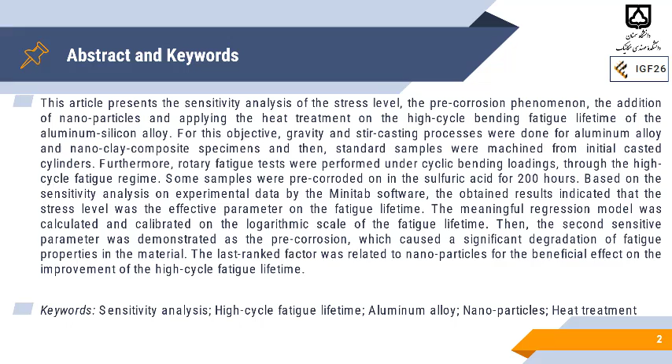Here you can see the abstract and the keyword of the article that will be introduced in the next slides.

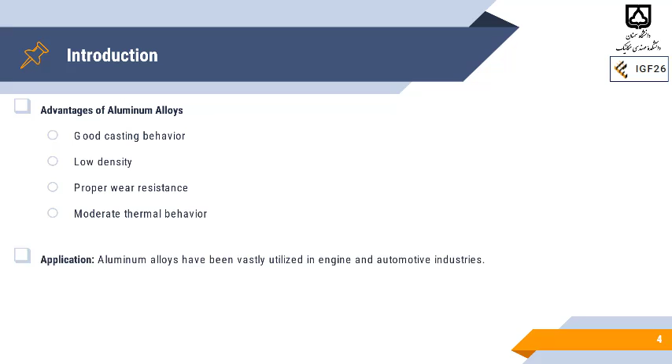For the introduction, I should say that we know about the advantages of aluminium alloy: good casting behavior, low density, proper wear resistance, and moderate thermal behavior. So because of these properties, we have different and a wide application for aluminium alloys.

They have been vastly utilized in engine and automotive industry. But what is the problem?

The problem is corrosion phenomenon, especially in combustion engines, especially in diesel engines, due to the presence of sulfur in the fuel. And what is the working condition in this component? That is cyclic loading under environmental effect, including high temperature and corrosive fluid in diesel engine. So we need to check the corrosion fatigue phenomena in aluminium alloys.

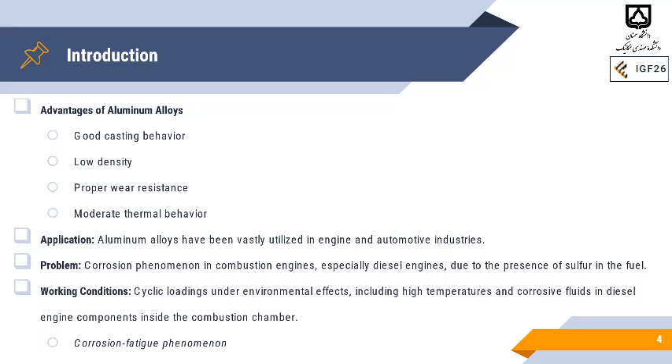What is the research method here? The material is as-cast piston aluminium alloy that was casted in a cast iron mold by gravity casting, but for the nanocomposite, we have used stir casting with 1% of nanoclay particle.

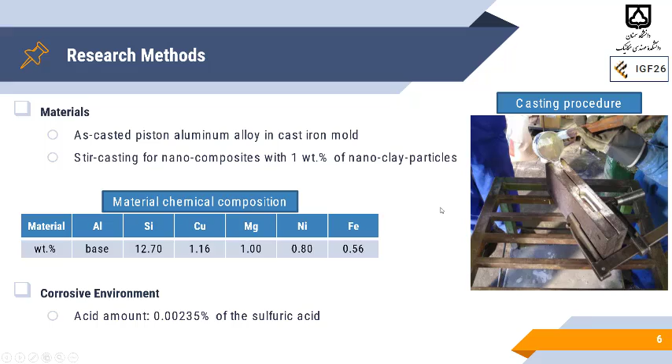For fatigue testing, we have used pure bending fatigue testing based on ISO 1143. That is our standard, that we have used under 4 stress levels: 120, 150, 180 and 210 megapascal by the SFT 600 rotary bending fatigue testing machine.

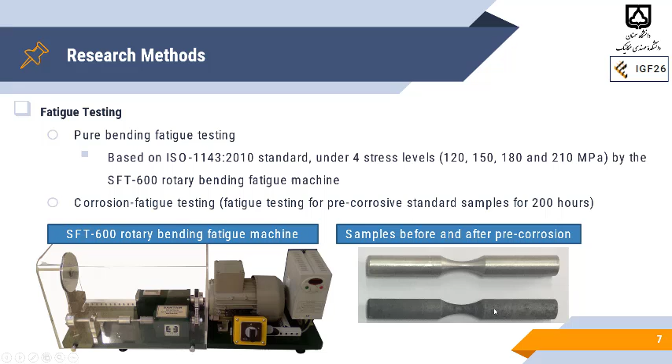And what's happened to our corrosion fatigue testing? We have done fatigue testing for pre-corrosive standard samples after 200 hours in the acid environment. Here also you can see the device, the testing machine, and also the sample before and after the pre-corrosion phenomena. You can see here some pits could be found on the surface of the sample due to the corrosion.

For the sensitivity analysis, we have used Minitab software for the regression analysis. If you use the risk level as 0.05, then your p-value should be less than this selected risk level. And if you have a higher f-value amount, it means that you have a higher effect of inputs on outputs. So if the p-value was less than 0.05, it means that your parameters, the inputs, are effective on outputs.

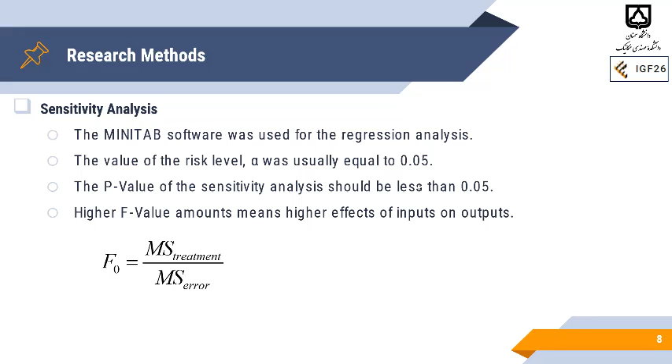And what is the input in our tests? Here is stress, pre-corrosion, nanoparticle, and also heat treatment. And what is the output here? It is the fatigue lifetime, both in normal and logarithmic scales.

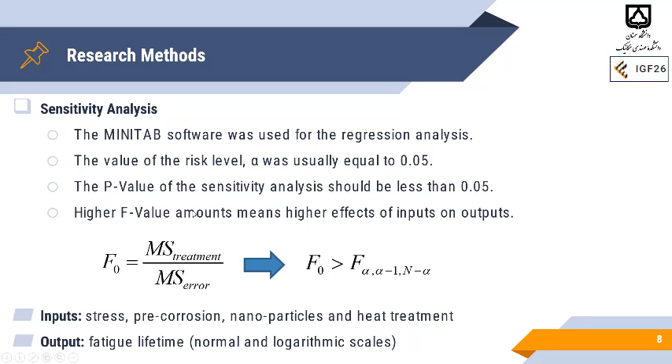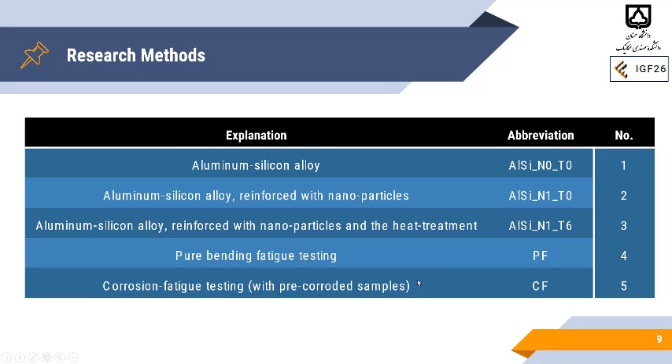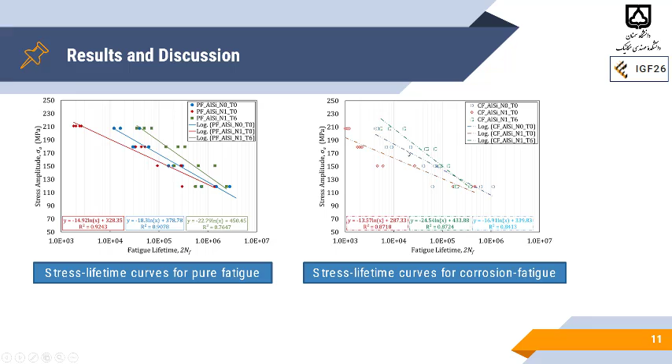If you check these curves, you can find that the nanoparticle heat-treated materials have higher lifetime, shown in green color lines, and here we also have the same behavior for corrosion fatigue. So under high stress level, the corrosion fatigue lifetime of aluminum alloys reinforced with nanoparticles and heat treatment increased compared to the base material.

This result could also be found in the literature, reference number 1.

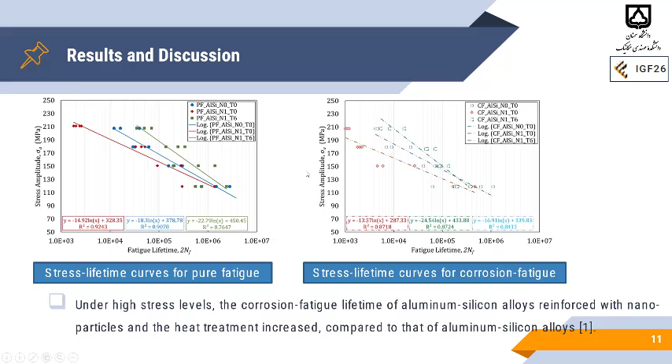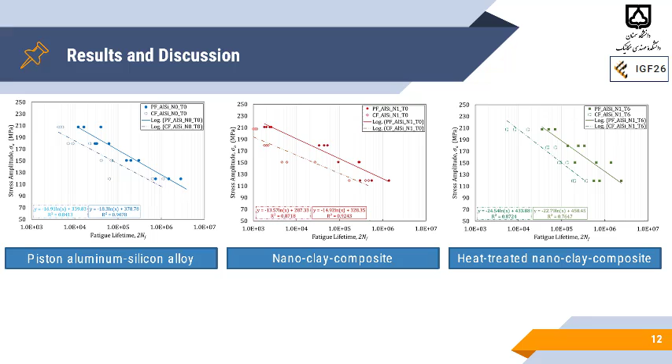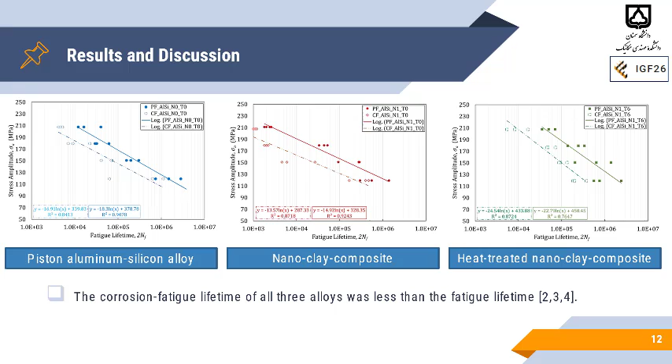For a better comparison, you can see here the pure fatigue curves besides the corrosion fatigue curves. The first figure is for piston aluminum alloy, the second is nanoclay composite, and the third is heat-treated nanoclay composite. Again, you can see a shift in all the results for pure fatigue, so the corrosion fatigue lifetime of all 3 alloys was less than the fatigue lifetime. Such behavior was also seen in the literature.

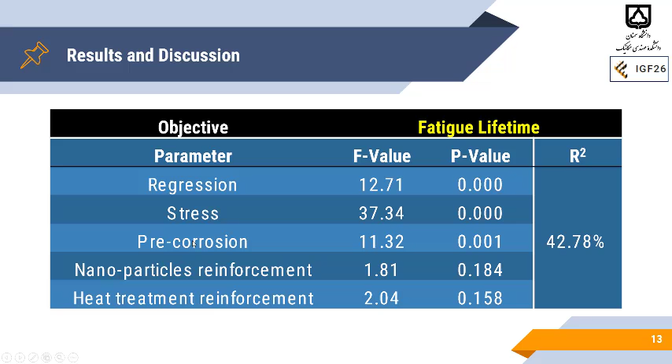For the regression, we have a p-value less than 0.05, so the regression was meaningful. Here we have stress and pre-corrosion as the effective parameters.

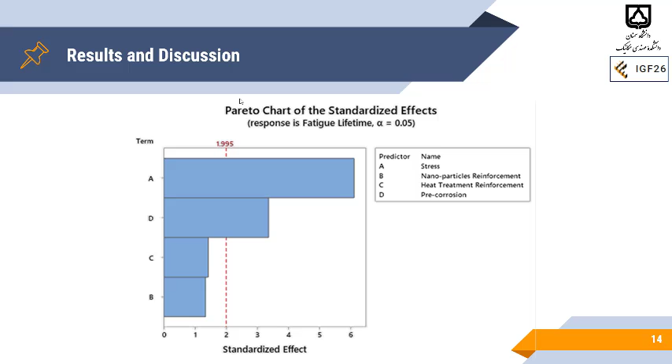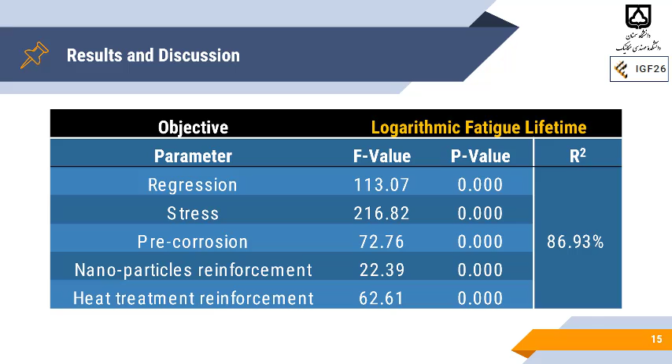So here also we have a proper p-value for the regression, and all parameters are now effective. From the Pareto chart you can see A is the most important parameter affecting the output on the logarithmic scale of the fatigue lifetime, which is stress.

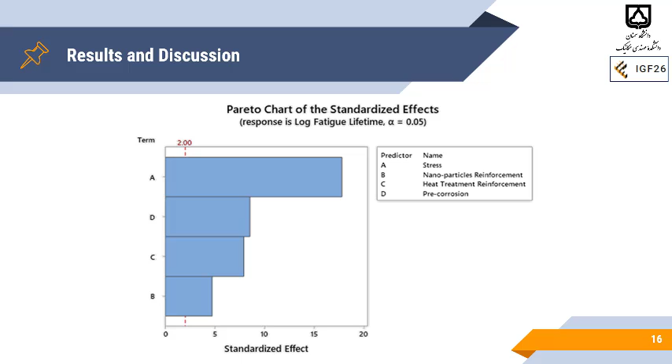Then D is important, which is pre-corrosion, then the heat treatment, and the last parameter which is also effective is nanoparticle reinforcement.

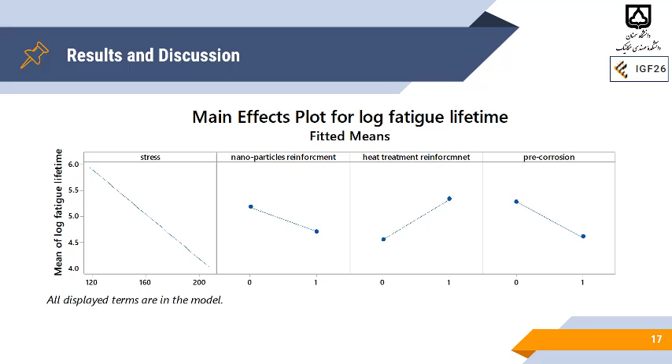If you check the trending behavior of each input parameter on the output, you can see, as expected, that by increasing stress, the fatigue lifetime decreases. With nanoparticle reinforcement, that is an interesting result: you have lower fatigue lifetime, but with heat treatment you have higher fatigue lifetime, and as expected, pre-corrosion leads to lower fatigue lifetime.

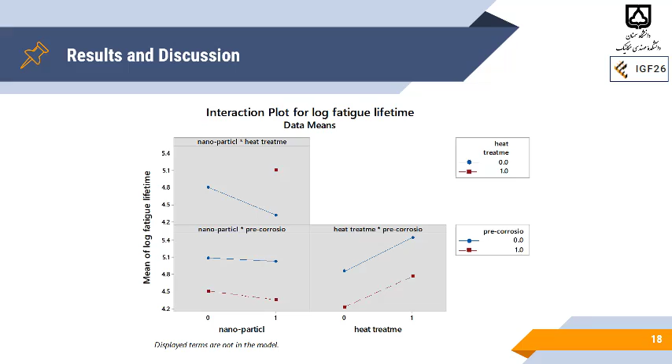So for the conclusion, the results of the fatigue test indicated that the fatigue and corrosion fatigue lifetime of the aluminum reinforced with nanoparticle and also heat treatment increased by about 128% and also 140% under high stress.

compared to the base material. And also for the lowest stress level, this behavior was not seen.

The lifetime reduction was more significant for 200 hours of immersion time in the corrosive fluid, so this behavior was more significant with high fatigue lifetime or lower stress level.

The corrosion fatigue lifetime of all three materials was less than the fatigue lifetime. That was due to the surface damage and pits caused by the corrosion reaction.

And the result of the sensitivity analysis showed that all four parameters, stress, pre-corrosion, nanoparticle, and heat treatment, had effective influences on the logarithmic scale of the fatigue lifetime.